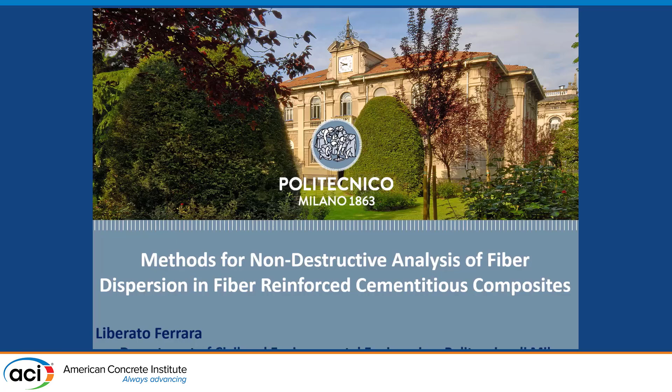Thank you, Bill, for the introduction, and good afternoon or good morning still, everybody. The work I'm going to talk about is part of what we call a holistic approach to the concept, design, and characterization of fiber reinforced concrete structures.

We nowadays see, also through new applications related to additive manufacturing, that it's really a fascinating material, because by controlling its rheology, controlling the processing, the casting, and so on, you can really tailor the material to do exactly what you want.

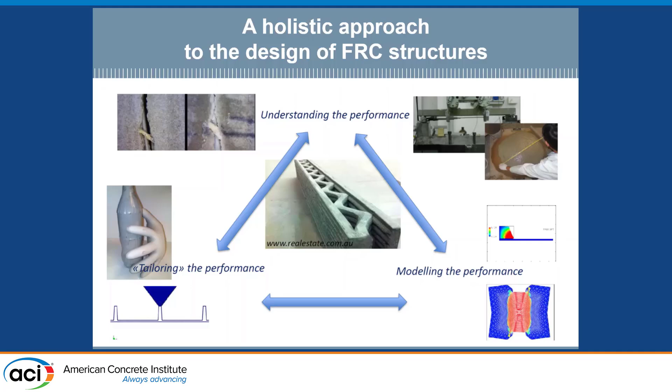One of the issues we encountered when we started working with this material was exactly the issue of fiber dispersion. There has been a lot of progress between workable concrete and self-compacting, self-consolidating concrete. I started studying the orientation of the fibers when I looked into self-compacting concrete. What was the occasion?

We worked with an Italian company on the production of precast elements for roofs or for girders. Very thin elements, where the fibers were instrumental in completely removing the secondary reinforcement for shear, for transverse flexure, and so on. You only have the main pre-stressing tendon in the longitudinal direction, but all the other kinds of reinforcement, except for some local ones in the edge regions, were completely removed.

But in the end, when we made the first trial test on full-scale mock-ups, we encountered unexpected failure modes. Partly this was because we had very thin slabs, so we ran into buckling problems, which are not so common in concrete structures, but also because we had poor dispersion of the fibers.

This is quite an old work, but we drilled the cores, cut them into slices, and X-rayed them. We realized that, for example, this is the same core - this is the bottom part, this is the top. There were no fibers on top, because with vibration the fibers go down and settle.

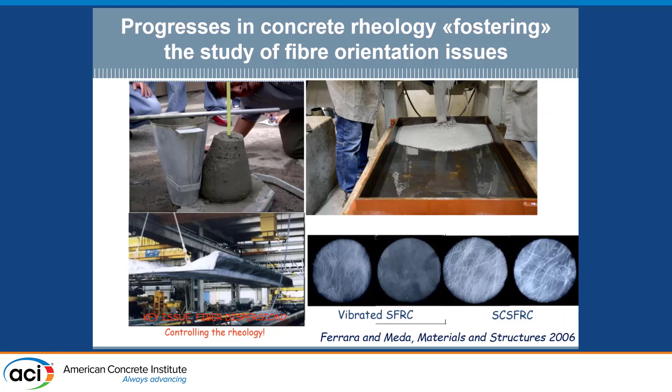So we worked out with the company and developed a self-compacting fiber reinforced concrete. We made the element, drilled the cores - this is the bottom and top part of the core - and we realized that by avoiding vibration, as self-compacting concrete allows, there was good dispersion of the fibers.

If you go back to your handbook of fluid mechanics and look for the Bingham fluid model, which is the one we usually employ to describe the behavior of concrete in the fresh state, you realize that when you have a fluid with low yield stress like self-compacting concrete, you might have a profile of stresses in your free casting flow like this, which, if you implement the constitutive relationship, below the yield stress the strain rate is 0, but when you overcome it, the fluid starts moving.

If you integrate this, you get the velocity profile, and the drag forces are similar. So if a fiber is crosswise to the flow, it aligns because of these forces. This is not the case for conventional vibrated concrete, because in that case the yield stress is very high, so what you have is a plug flow, and you simply push your fiber rigidly ahead.

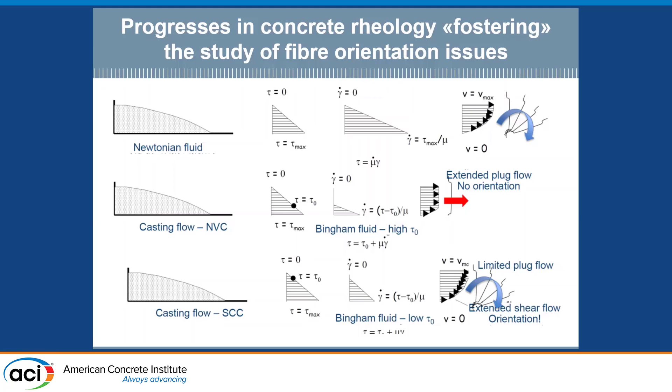So with this self-compacting concrete, with low yield stress, you tend to go back to the theoretical profile for a Newtonian fluid. We wanted to verify this, so with my colleague Professor Nilüfer Özyurt, who is now at Boğaziçi University in Istanbul, we did quite some work with mock-up castings.

We had the flow in one direction to align the fibers. We cut sections at different distances from the flow, and analyzed the micro images, reconstructing the elliptic cross-section of the fibers and calculating the angles. We ended up with the available projected length of fiber along each direction, which we call the orientation number.

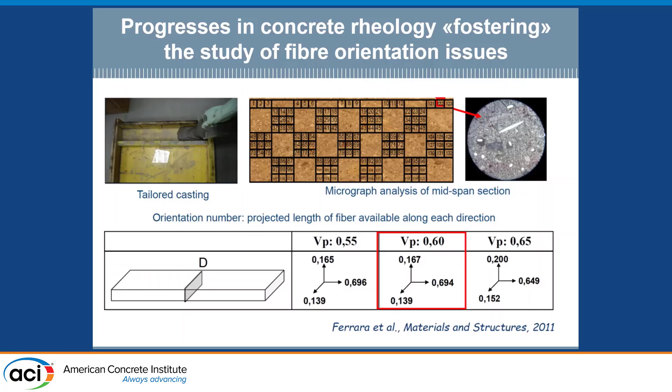You see that along the direction of the flow, you have about 70% effectiveness of the fibers. You cannot avoid some three-dimensionality also in the other direction, but 0.7 is quite good.

So then we said, okay, but this is quite time-consuming. If you have to go to industry, you need non-destructive methods. So we worked with different methodologies.

We tried the thermal methods. We worked with impedance spectroscopy when I was in the US at Northwestern University. Then we ended up with this magnetic inductance method.

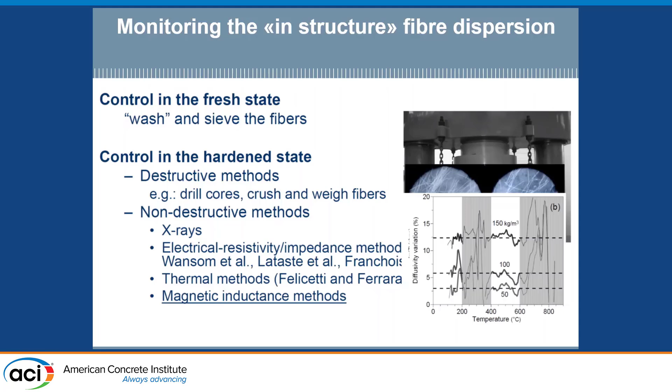Very simple, this is the first version, very rough, of our sensor. It was simply ferrite, old-style telephone handle. I don't think there are any more telephones with a device like that. There is a winding here.

The electric current passes, generates a magnetic field, and when you lean this probe against the concrete slab, you close the circuit, and the sensor feels the alignment of the fibers, because according to this alignment you measure a different inductance if the fibers are parallel or orthogonal to the flow. You can use the mixture rule, linearize it, because the content of the fibers is usually in the range of 1 to 2% by volume.

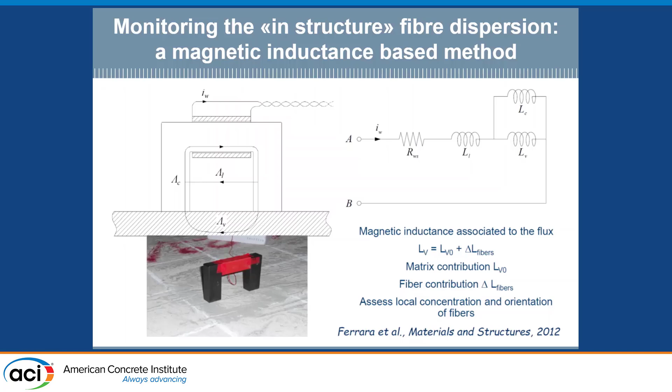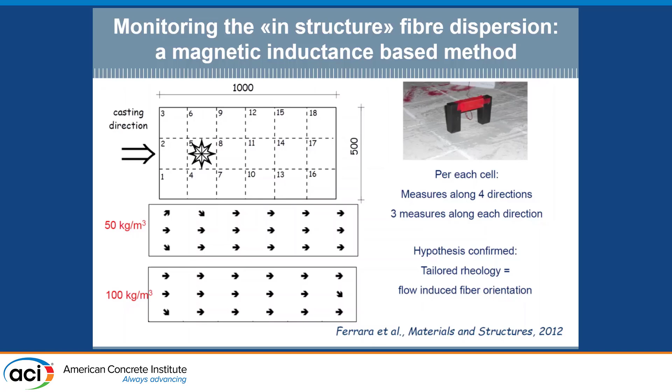Through this method, we were able to have an idea of the local concentration and the alignment of the fibers. We did some larger castings, slabs 1 meter long, 500 millimeters wide. We tried with different contents of fibers. We verified the alignment.

But most of all, we wanted to quantitatively calibrate the methodology, so we had some volunteers. We cut the slab into squares. We crushed it after we made the magnetic survey, but we crushed each tile that we obtained from the slab and separated the fibers and measured the content.

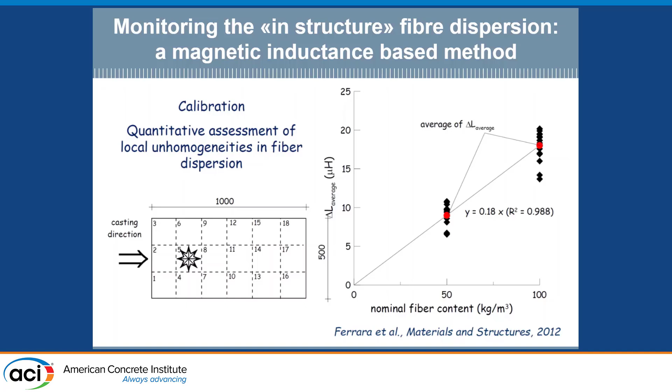Based on this, we calibrated the correlation between the measured magnetic inductance and the content of the fibers, and you can see that we have quite good predictions, because the non-destructive method gave us 108.7, here you have 109.5, 1.1, 0.9. So the calibration was quite good.

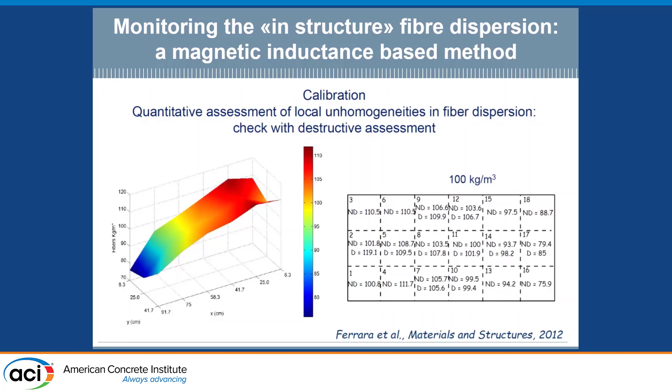As a matter of fact, what you can see here, and probably the previous presentation also said that, as long as you go farther from the flow, you have some fibers who settle down and are no longer driven, so the content of the fibers tends to become a little bit poorer.

And then, which was the further implication? The further implication is how this translates into the mechanical performance of the UHPC, because if you have alignment of the fibers, you can expect that the performance of the material in that direction is enhanced. But on the other hand, on the orthogonal direction, the performance of the material is weaker. So you, in a sense, have a benefit, but you also lose the isotropic assumption of the material.

You must accept that you cannot design your material any longer as isotropic. We cut some beams, parallel or transverse to the flow. We tested them, and some exemplary results are this. These are the beams with their longitudinal axis parallel to the flow, so parallel to the most favorable alignment of the fibers, and these are the beams which have the alignment orthogonal to it.

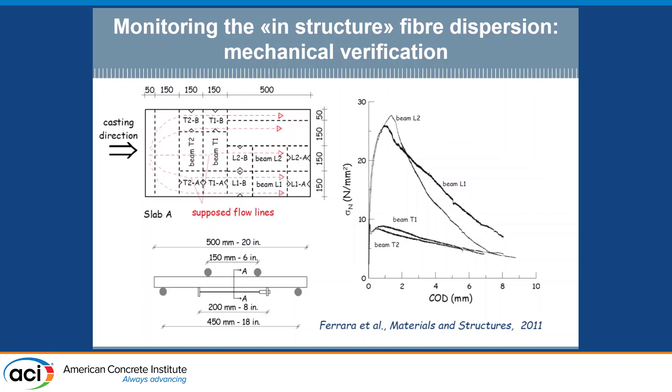We removed the region where the fibers were cast, because there you have turbulent and random orientation. So, as I said, there is a pro, because in this direction the material has a very good performance. There is the con, because in the other direction the material is weaker.

Then we made different tests, and we calibrated, so we had the correlation between the different residual post-cracking strengths at different crack opening widths, which you can select as relevant for your design, and we correlate the orientation densities. Some of the results also inspired the formulation that now you can find, for example, in the FIB model code or Eurocode, where you can have an orientation factor which affects your design post-cracking residual strength parameters for fiber reinforced concrete.

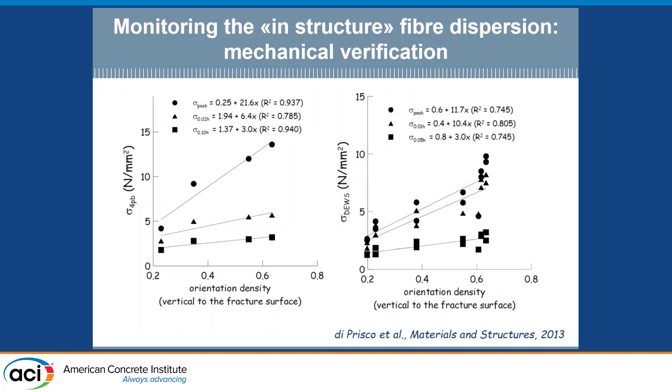So then we made a step back. We said, okay, we know that we can align the fibers thanks to the flow, and we know how to monitor that. So the question was, how can I design the flow so that I get the orientation that I want? So we moved, in a sense, from the structural design to the process design.

We wanted to model the process of the casting. These are some snapshots. I'm sorry, I tried to put the movie, but the system did not support it, so I had to extract some snapshots.

We developed an in-house particle finite element-based code for computational fluid dynamics, and we decided for computational cost effectiveness to consider the fiber reinforced concrete as a homogeneous fluid. We know that it's not correct, but we thought that this was a good approximation between computational efficiency and the reliability of the information that we could get.

We started modeling a very simple problem that we also tried on the experiments. This is a beam according to the European standard for testing FRC, so we put a V-funnel, the one that you use for SCC, in order to limit the human intervention to the casting. We filled the V-funnel.

The volume is more or less the same, so we were lucky. We fill the V-funnel, open the shutter, and have the flowing concrete filling the mold. We tried filling on one side, filling on the other, and we modeled this process.

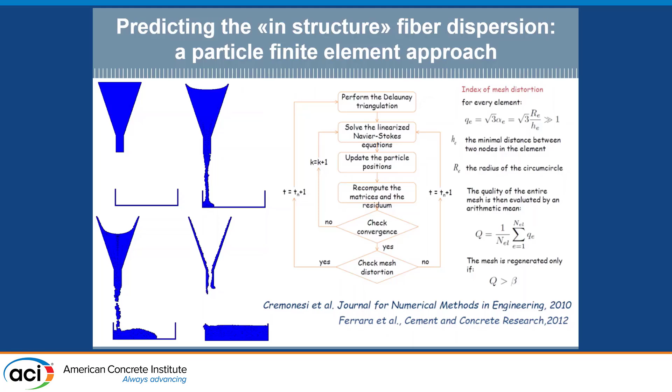We also applied this to model some slab casting. We had one slab cast from the corner, and these are the flow lines, the velocity vectors of the flow.

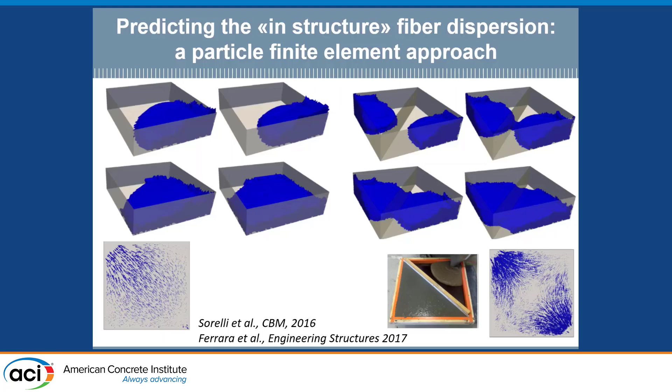We wanted also to see how internal boundaries affected the flow, so we put a shutter here, and these are the velocity profiles. What we did is perform the magnetic survey on these slabs with our probe, and in blue we have the front of the flow lines, and in red we have the direction of the major fiber alignment in the flow.

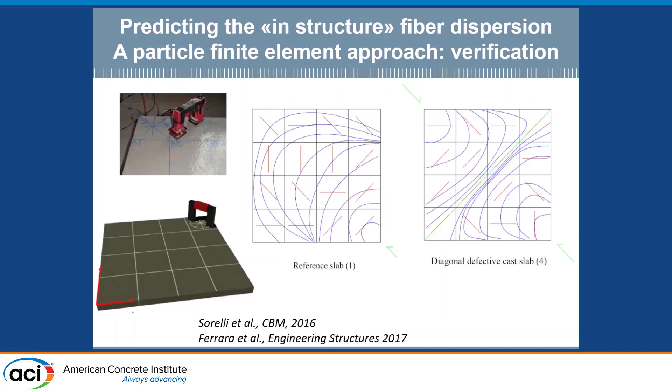In this case, with the 2D flow, you lose the one-directional alignment because you no longer have the constraints of the boundary, and what happens is that the fibers are driven parallel to the advancing fluid front. In a sense, it's good in this case because in a 2D structure, a slab, you do not want a one-directional alignment if you want to exploit the slab action, but you want an alignment which replicates what we had here.

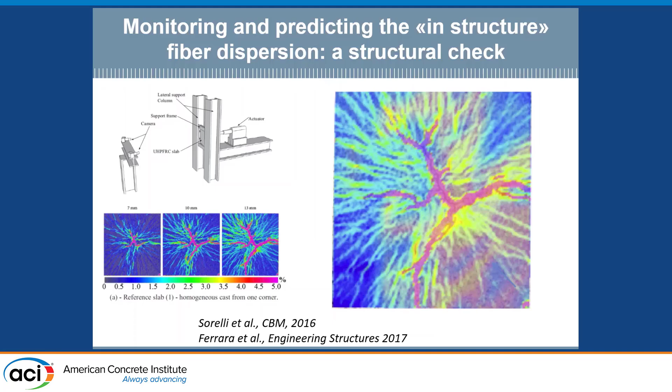So which was the final step of our work? We wanted to bring it to the real job site. The chance was a European project in which we wanted to use UHPC, for durability and self-healing reasons, but we tried to plug in also this work.

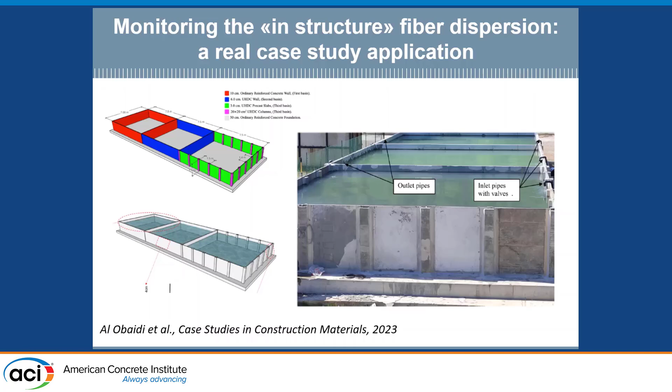This is an image of the basin when we made the validation test, and we monitored the dispersion of the fibers. What we did realize, for example, is that casting vertically this 1.5 meter tall section, cast all at the same time, there was some segregation of the fibers in the top part of the slab.

You cannot avoid that. So this was a learning by doing experience, and we recommended for the construction—it's a district geothermal basin in Italy, they have several of these tanks so they will construct more—that if you want to build just casting layers, use some dowels to connect to avoid this segregation.

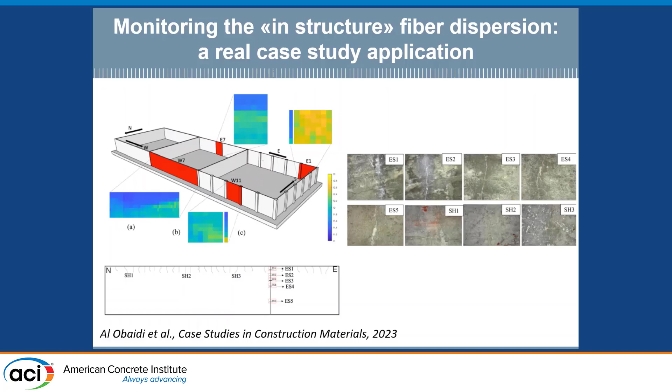And what was the outcome? The outcome was that the shrinkage cracks—this is an 8 meter long wall, UHPC has quite some shrinkage—we only observed shrinkage in the top 10 or 20 centimeters of this slab, just because this was the zone poorer in fibers. We were also lucky because, as you can see here, due to the self-healing capacity of UHPC, those cracks completely closed.

On the other hand, for the horizontally precast slabs, before installing them, we made a complete survey of the fiber dispersion, and thanks to the calibration we previously performed, you can see here we got a good average constant of the fiber content in the slabs.

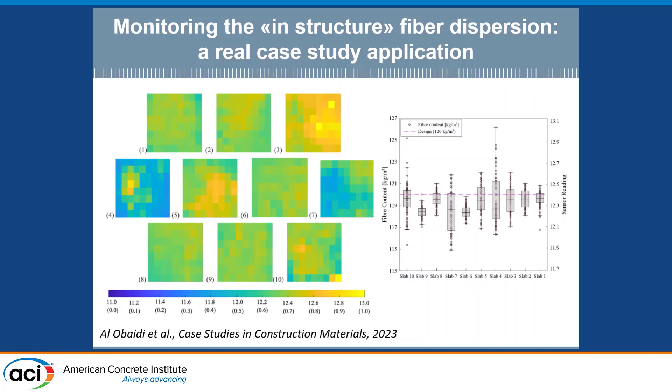The basin is now under operation for about 2 years with no problem, so we are quite happy about that. Just to come to the conclusion, or rather a summary.

We developed this non-destructive magnetic-based method for the monitoring of fiber dispersion and orientation. We validated and calibrated it at the lab scale, and we also associated it with computational fluid dynamics prediction in order to design the casting process so that we have the fibers aligned along the direction that we want.

In a sense, you can make a computational fluid dynamics prediction and match it with the classical finite element analysis so that the fibers are aligned along the direction of the principal tensile stresses in your structure. This will be the optimal outcome.

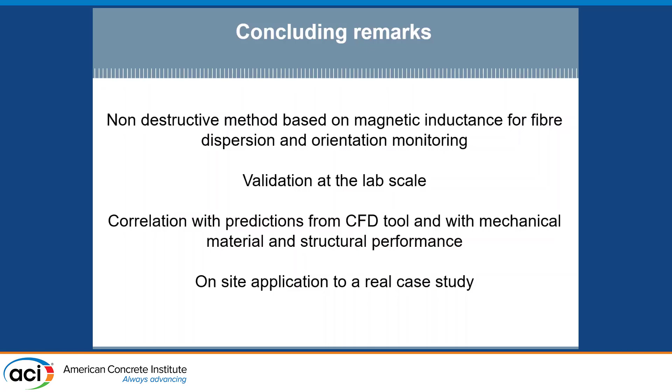And we applied it and demonstrated its scalability and feasibility also to a real case study in the industry.